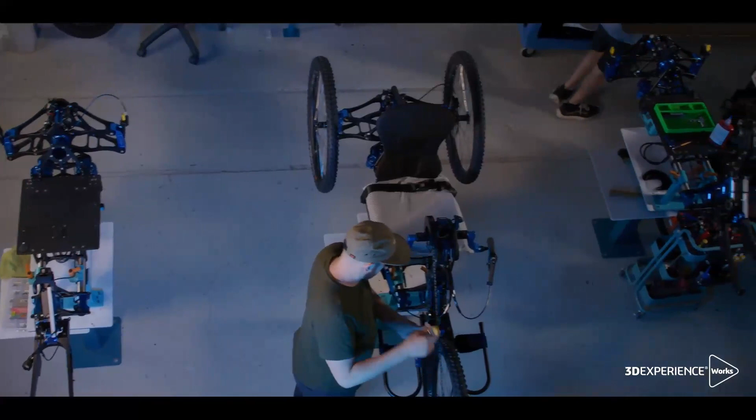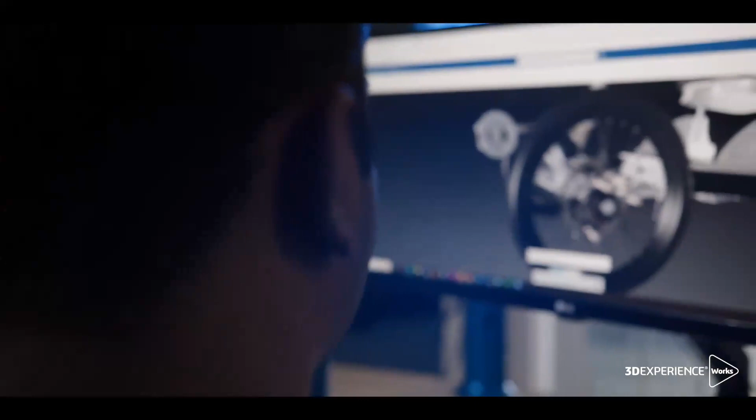So he started off with an initial design, and as we expected, ran into design challenges. So he started acquiring the SolidWorks software, and from there onwards, his product just got better. You now have 3 different types of development products in the market for different types of customers, automated systems or a hand-driven unit. Since then he started his own business, manufacturing and exporting these cycles to different clients and customers, making him a very successful businessman. As we speak, he's actually also busy working on a 4th iteration of this bike. His feedback on this video, unfortunately there's no audio, was that without the use of SolidWorks and the capabilities of the SolidWorks portfolio simulation solutions, he wouldn't have been able to come this far in his design cycles in such a short period of time.

He's also, using our software, exporting to his partners, customers, stakeholders, and sharing data with his manufacturing, with purchasing, with his other team members. So as we go through the portfolio, you guys will see how he achieved this moving forward.

So the focus of today is pretty much to improve productivity, focusing on design, how we can make our designs better, have a better end product at the end, and then expand, like the Boet team, expand what we have and use the SolidWorks portfolio to make our products better for our end customers and have a quicker time to market.

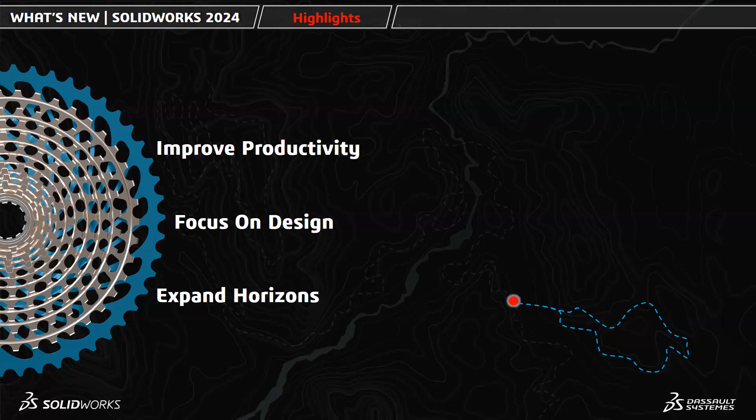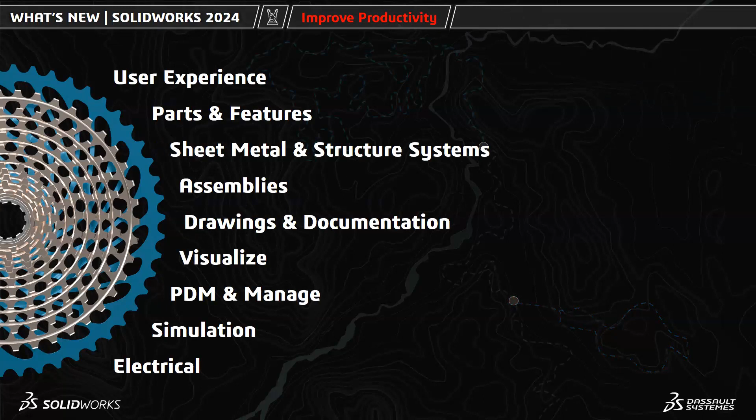A short overview of what we will cover: some of the user experiences, parts and features, some enhancements in sheet metal, our assembly environment, the important drawing changes, how we can do renders for our customers, and simulation changes to see how something would behave under certain stresses and factors.

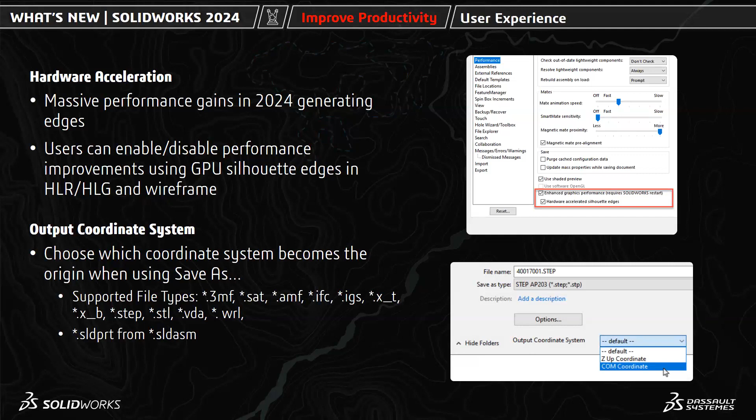So let's take a look at some of the parts and features enhancements that made this possible for us. I now have the capability to set the preview in my sketch environment, where I can actually put dimensions on. I'll show you in a short video clip just below this.

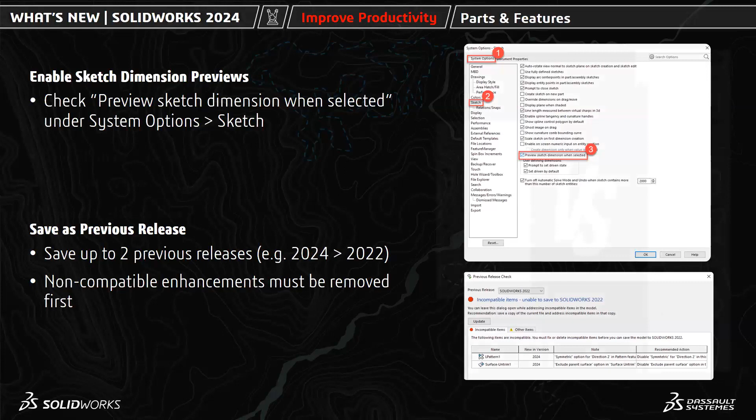When we look at simple part designs, our feature tree has expanded exponentially. There were just a few functionalities before, and since the 2024 release, I think the feature tree has expanded almost double. Mass calculations has been a huge factor in working with parts and the assembly environment.

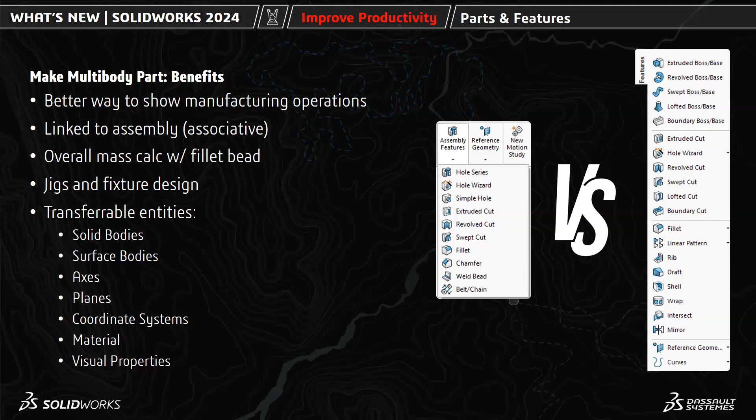So I can have an invert function of a sketch, which was not previously possible for part designs. Also on the same part, especially for the manufacturing side, I can now have a cylindrical or a square bounding box, so I can define the material around the specific part.

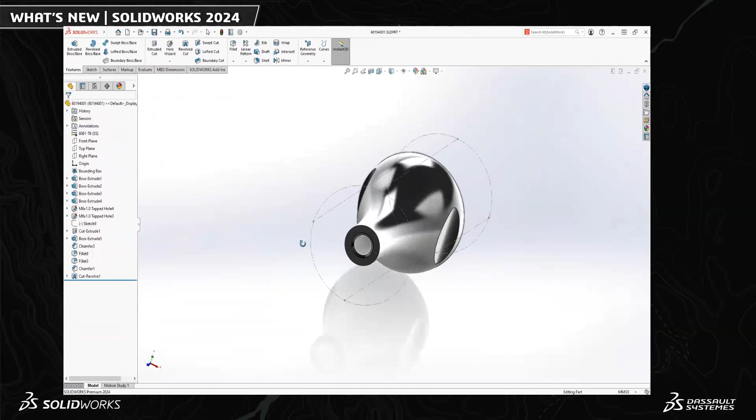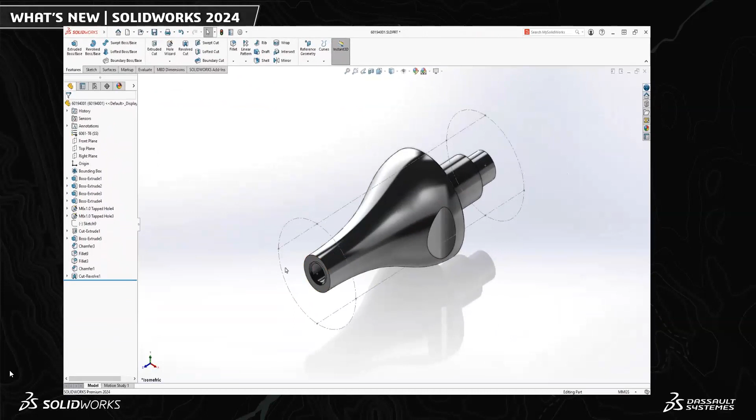Let's say I want to manufacture this part and send this off to my CNC machine. I can then tell procurement, this is the part that I want to machine, this is the bounding outside material that we need to order, and I can make it part of my part list. So it makes it much easier for procurement and material ordering.

Some nice features for hole enhancements: we have a hole wizard where we can put in intelligent data for hole annotations and hole creations. As you can see on the preview, I can put hole positions from a sketch, use the pattern, and then deselect which holes I don't want to be part of that selection.

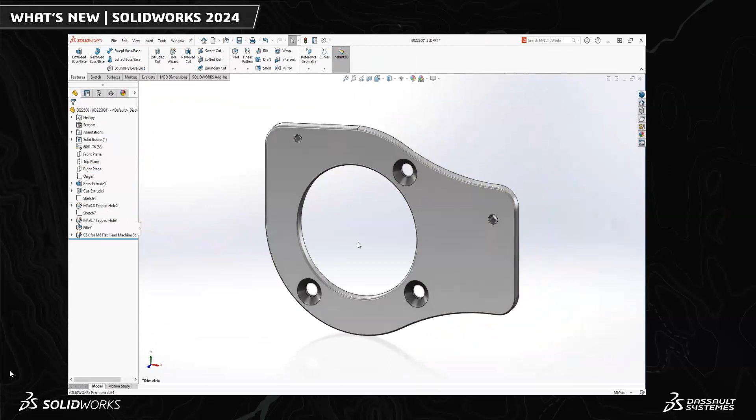A great enhancement that I personally like is the hole wizard linear pattern, where we have more control. As you can see here, we just have two simple features. I want to pattern this in two directions, and I want it to follow a specific shape.

So just to show that again, I'm taking that pattern of mine, making it symmetric around one axis, and I want it to follow a certain part. So it will actually follow the curvature of this part, which was also not previously possible.

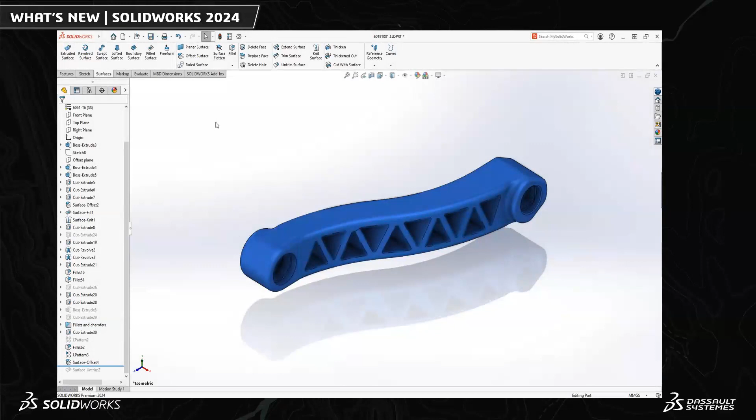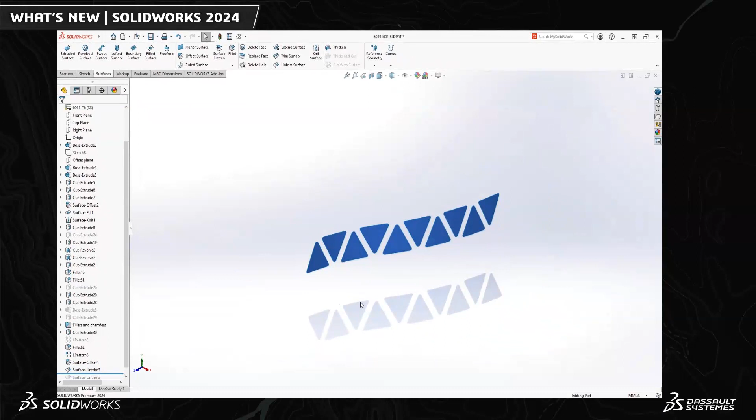So I can then take that specific part and cutoffs, and I can now actually create surfaces from geometry that does not really exist. So let's say, for instance, I want to use this for a 3D printer, or to have that 3D printer support. I can have an invert selection, create a surface from that, and use that then as my supports when I want to do 3D printing.

One of our big ones, as explained before, I can take my part design and save it down to a previous year release version. This down saving capability is for part design, for assembly design, and for drawing. So it's not just for part environment or drawing environment.

If I want to use specific parts in manufacturing, I can take an assembly and convert it to a multi-body part. This works especially great when I do manufacturing or machining, when I want a lightweight design because in the end this is going to be one part. So I would have one assembly at the factory, but I can create this as a multi-body part. I save it off as one part, and I can machine and manufacture on those multi-bodies separately.

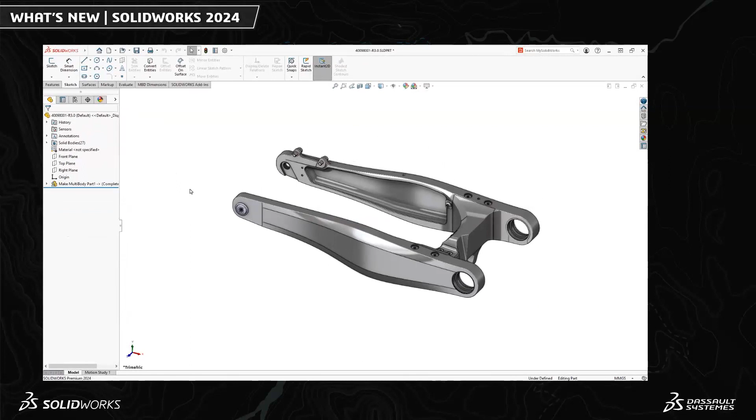Let's take a quick look at what our capability enhancements and changes were for sheet metal and structure systems.

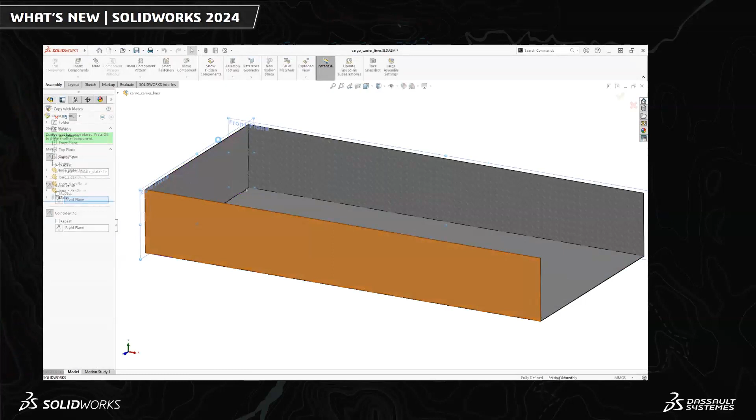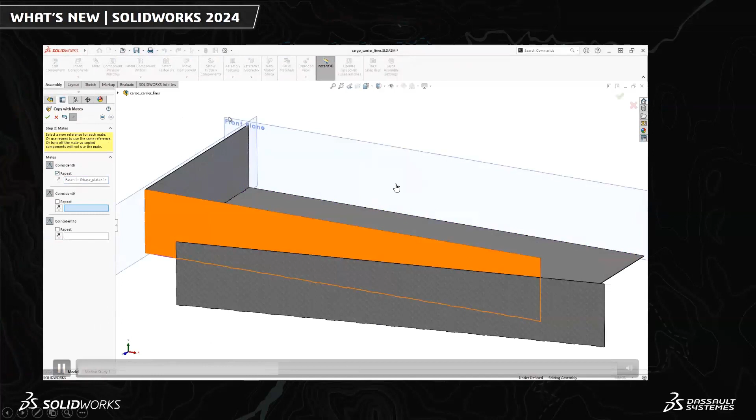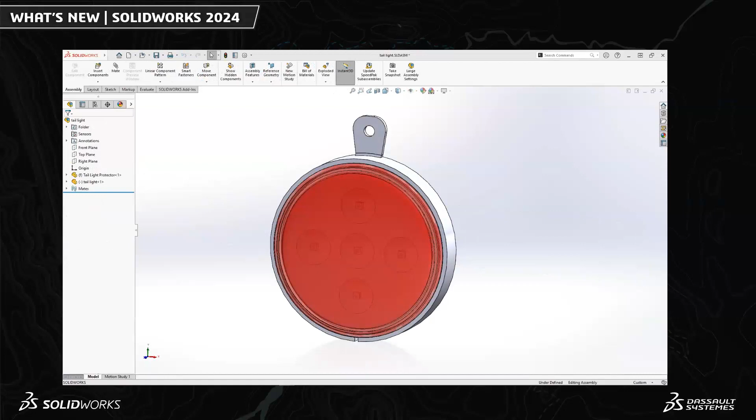Also a great tool: I can take a standard part, put a rip functionality in it, and create a simple flat pattern directly into sheet metal for manufacturing purposes - fold, flatten, and unroll my assembly just with a simple click of creating a rip in that assembly.

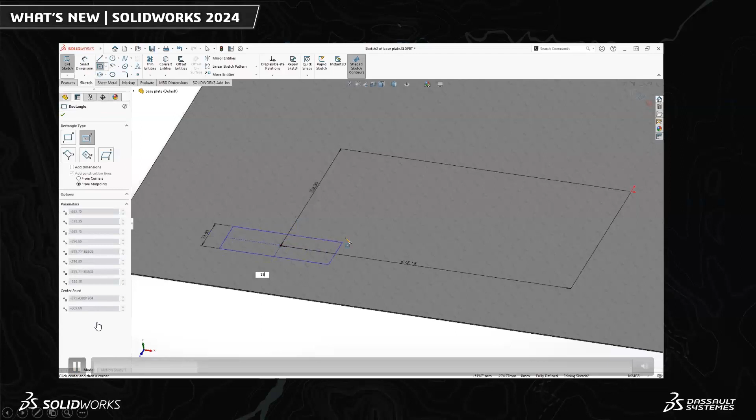A great tool which I love is the new stamp from 2D sketch. I'm just creating a simple 2D sketch extrusion and converting it to a stamp format. I used 2D capabilities, a normal square rectangle which I drew, and from there used the sheet metal functionality to say I just want to use this as a stamp feature, and put in the stamp values. Using macros, I have my stamp capabilities, making life way more simple in the sheet metal manufacturing industry for us.

One big enhancement for our structures is end treatments. Previously I had to do end treatments one by one. Now I can select all my end treatments simultaneously, choose what end treatment I want, and get that end treatment applied to the whole assembly done for me.

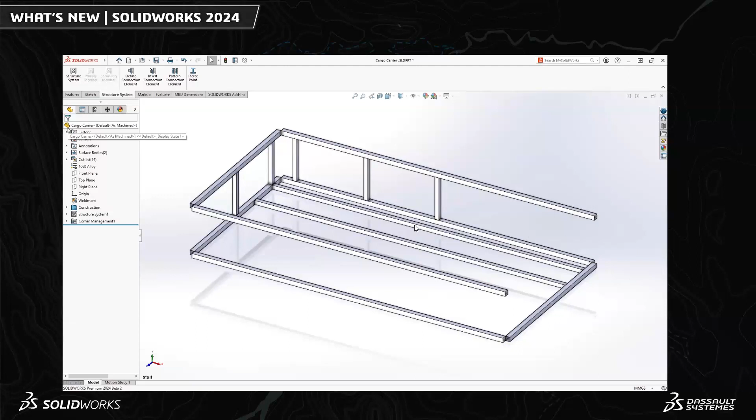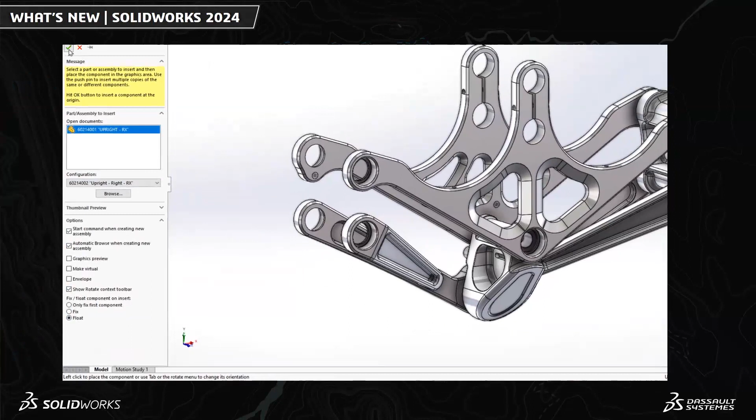Let's take a brief look at the big enhancements we have this year for assemblies. Except for performance and speed enhancements, there are also a few nice, very useful advancements for assembly. For instance, I can set my assembly for inserting floating components - set that as a floating component, and now animate without having to put different weird constraints or dimensions on it. I have now a floating assembly just by using the floating assembly function we have in 2024.

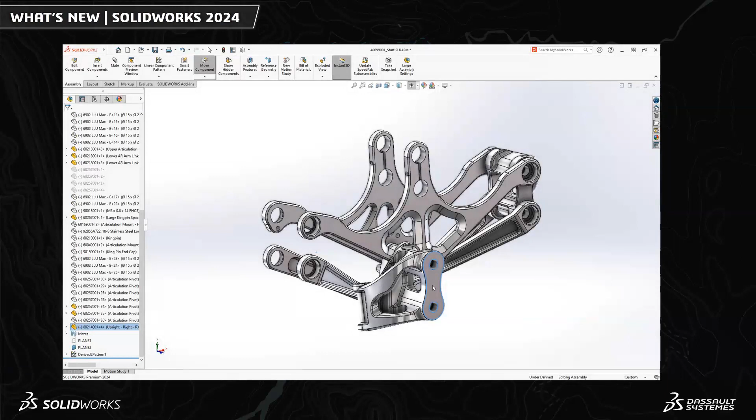Another great feature is using the width mate feature. If I have a part that needs to fit into another part but needs specific spacing between those parts for free movement, gusset, or spacer purposes, I can use the width mate function and say center this part between those two faces, and it will automatically calculate those distances and put that part exactly in the center between those two frame parts.

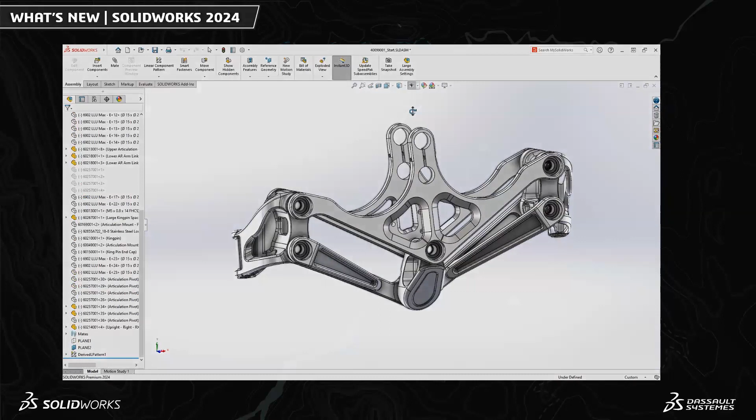Also, if I have specific pins that need to work in specific areas only, I can have a mate reference - we call it intelligent mate. So those rivets can then only fit in specific areas. If I have specific parts or components that only work in specific areas, I can predefine that mate automatically, and as you can see in the preview, it snaps to that mate. It will not fit into other holes - it will only snap to those predefined values I have set.

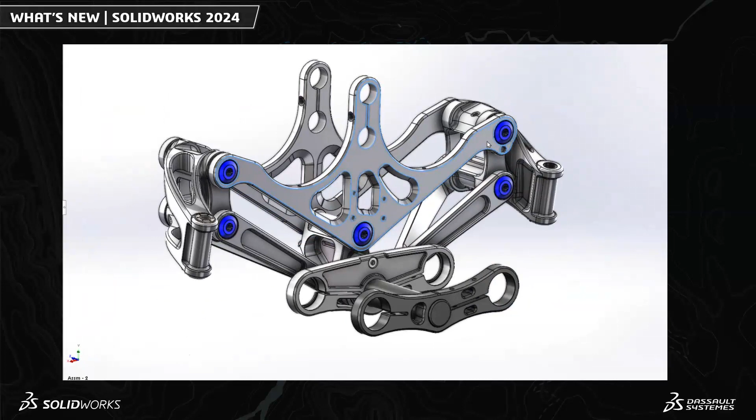I can take this further by bringing it back into my drawing environment. I can take custom components, put a component reference into that part, and when I go back to my drawing, I can bring those custom references back.

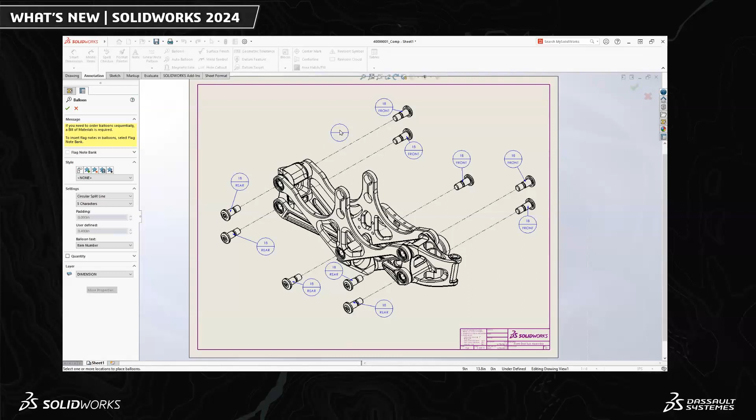These pins need to fit in the front of this assembly, and those pins need to fit in the rear. It works very well when I have specific components that only work in specific areas, and I can send this technical information back to the shop floor or assembly floor so people know exactly where and how to assemble this without any confusion.

Another great feature I love to use is the defeature function. So I've designed this model, and my customer wants to see what we have, or we want to use this as a placeholder in a bigger assembly, whatever. So I can use the defeature functionality.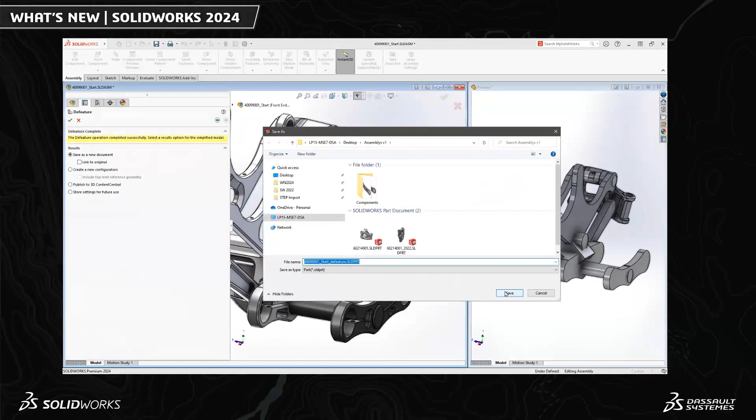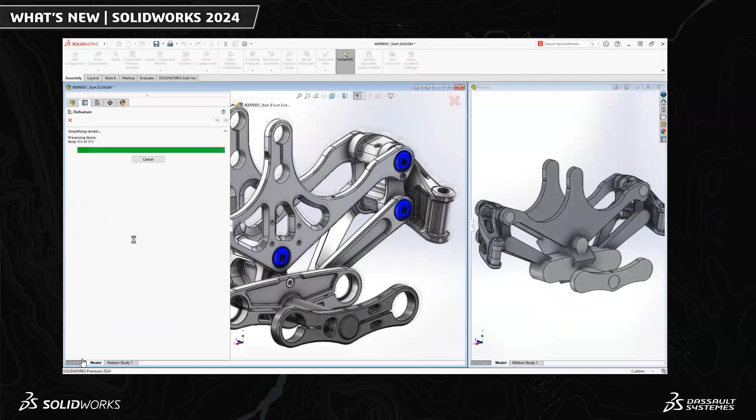What it does is allow me to decide which intellectual property I want to remove from this assembly or sub-assembly, and it will only show what I intend. So it does two things: it takes away my intellectual property, and it reduces memory for a lightweight placeholder if I want to use it in another portion of my designs or other sub-assemblies, which makes this defeature functionality a very useful tool.

I can also add flexibility into the movement of my assembly. I just want to see... oh, this one is not playing, sorry. I just want to add flexibility to see the movement of specific parts within the specific assembly, without clash detections, without interference.

I would simply select the flexibility function, and as you can see in the preview, the front axle I've moved with my limitations, so I can see if there are interferences, if it will work, if there will be any clashes, and so forth. Previously, this function would require a lot of constraints and constructions. Now it's just a single button, which is huge for us as well.

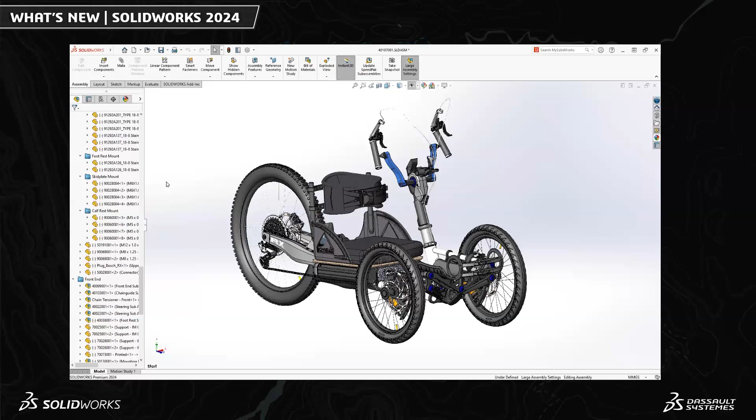If you can quickly look at drawing and documentation functionality.

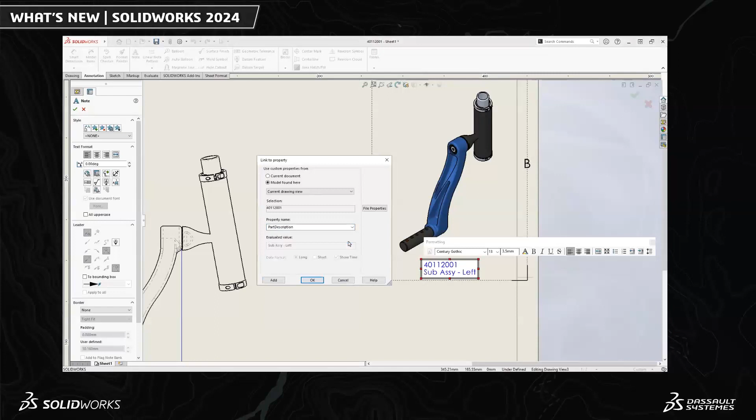Previously, if I had specific properties that I wanted to link into my drawing, I had to either type it in manually or override my drawing. Now I can add those properties into my designs, and then pull those properties back to my drawing, making it interactive and more intelligent.

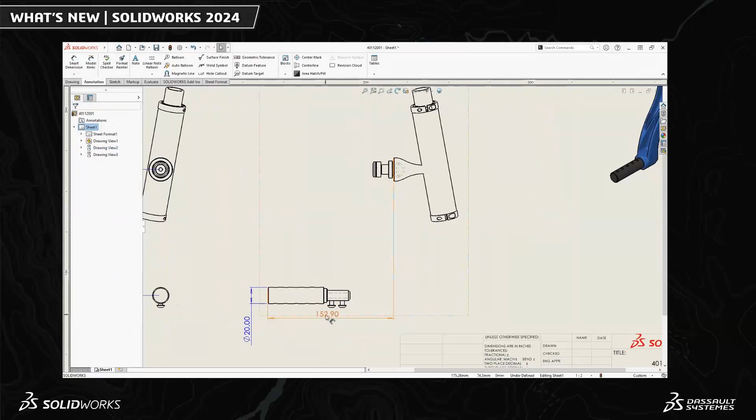So when that property, dimension, or name changes, my drawing updates automatically. Sometimes when my design changes, my dimensions seem to dangle. Previously, it was always difficult to find out which dimension wasn't in its right place. Now in 2024, I get a preview with a green color showing me that dimension isn't in the right place. When I click on it, it gives me a red indication of where the broken link is.

I can just click on my new dimension and it will reattach those dimensions for me. There's also a big enhancement for chain dimensions. I can just select the chain dimension functionality on the portions I want to create the chain dimension, and it creates the chain dimension automatically for me.

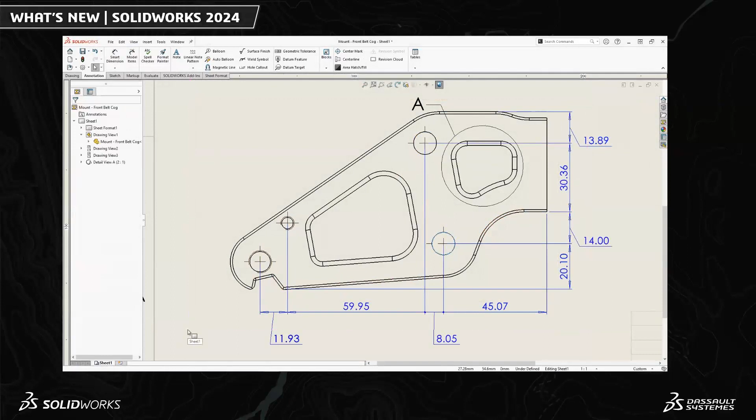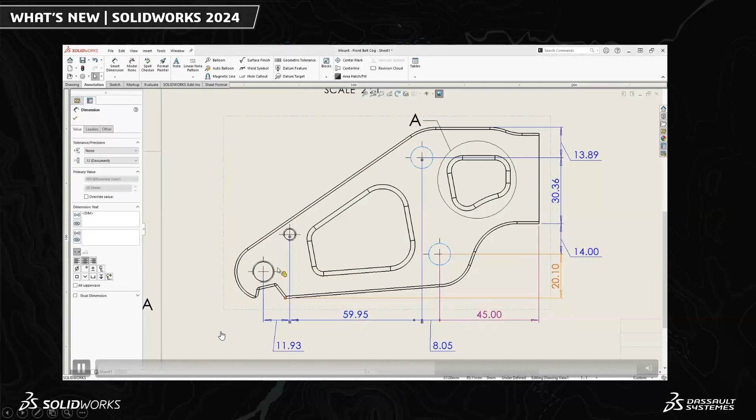Sometimes we get a dimension that was changed by someone, overridden in the drawing, and I wouldn't know. I would have manufactured this only to learn that it doesn't fit, that it's wrong. But now, if I get a specific size and override those dimensions, it will actually change color in the drawing environment. So I would know this dimension has been overridden with a specific value, and I can investigate why, or whether it will still fit or work, saving me time and a lot of money from throwing away prototypes because of incorrect dimensions.

But sometimes we need to manufacture directly from the 3D model. So in 2024, I can now have my hole tables inside my model, inside my 3D design. It doesn't have to be a drawing, so I can pull a whole dimension table exactly straight from my 3D model.

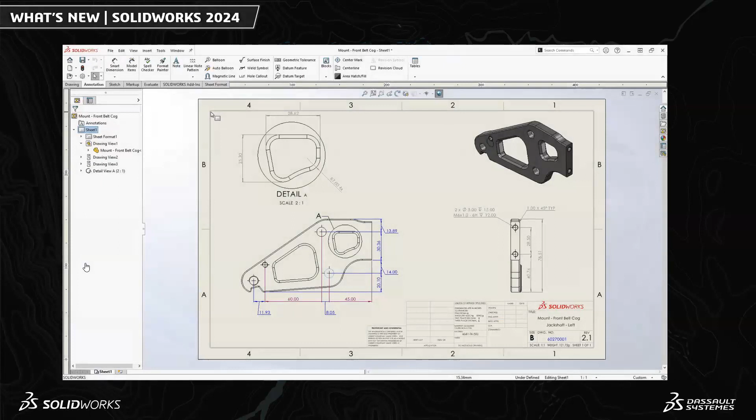And similar with the parts and assemblies, as explained before, I'm also allowed to save this down to a previous year release and just rename it according to my needs.

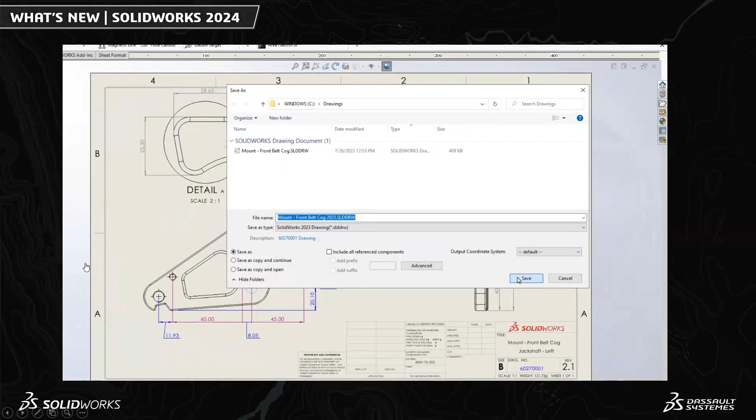A lot of enhancements has been made on the way ray tracing has been done, the way lighting has been done, keyboard shortcuts updated, and more flexible, easy to use, customized libraries brought into Visualize this year. A reorganized library provides all appearances in a new format ready to download just by drag and drop.

Appearances will be organized into their own subsets with only the applicable settings shown. However, each material is built on the full enterprise shading model, which has controls to make complex and nuanced appearances. I can have my own libraries imported in, create my own colors, use the extensive library that is part of the install, or download different colors and appearances.

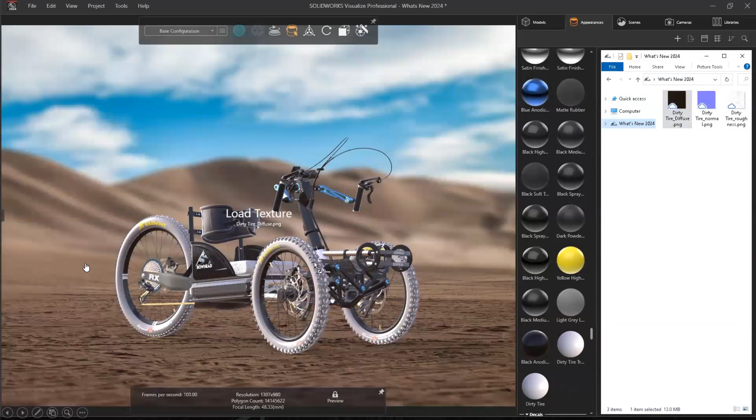Just by dragging and dropping those appearances from my library directly back to my model, it will automatically update that appearance, and you will see that the coarse tread of the tire has changed just by bringing in those properties from outside.

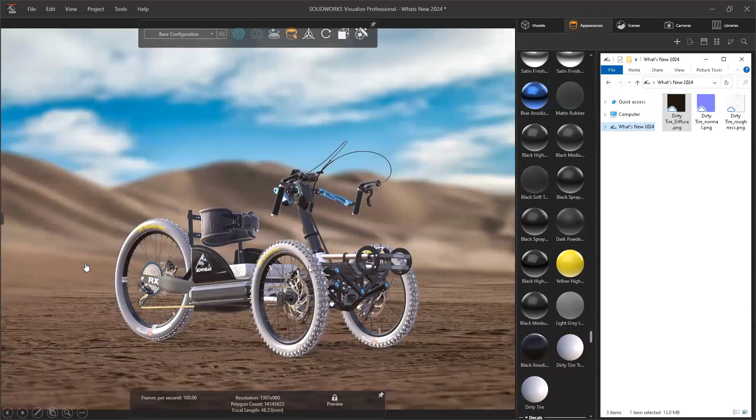The quality of the renders have also changed significantly. These qualities often has made use of image textures, maps, DSPBR formats, and now with the 2024 release, the way the processor takes these and computes these renders has saved a lot of time and effort bringing in those appearances, so I don't need such a high-end machine anymore to do those high-end renders.

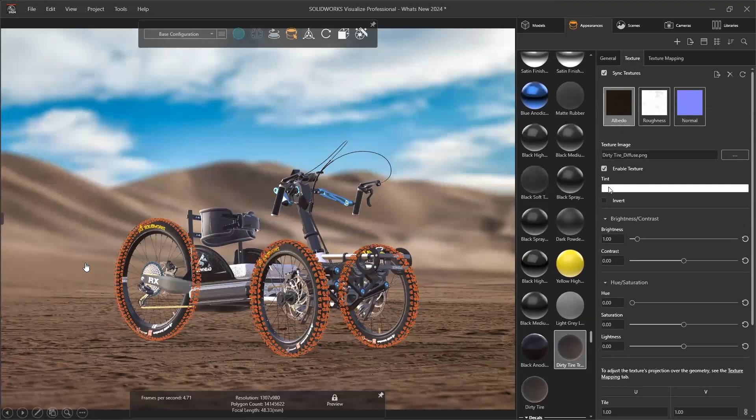I can take my custom properties, just bring it in from there, or I can take external properties that I've designed myself. Any image I can think of, I can bring in as a background, as a texture, and use this back into my custom renders that I'm busy with.

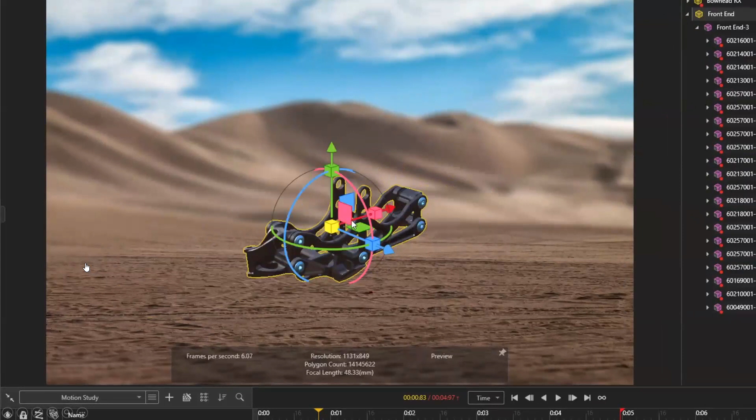But setting up your scene can be time consuming. Parts of the renders can be taking a lot of time. So in 2024, it dramatically reduces the time with a revised manipulator. Consolidating and highlighting, the new manipulator looks similar but offers a much cleaner experience.

So if I want to have a specific representation of my assembly, I would simply use this manipulator and then select which parts and files I want to use. I can just pull it out in a presentation format, and create photorealistic renders of how to assemble or how to view or how this part would come about.

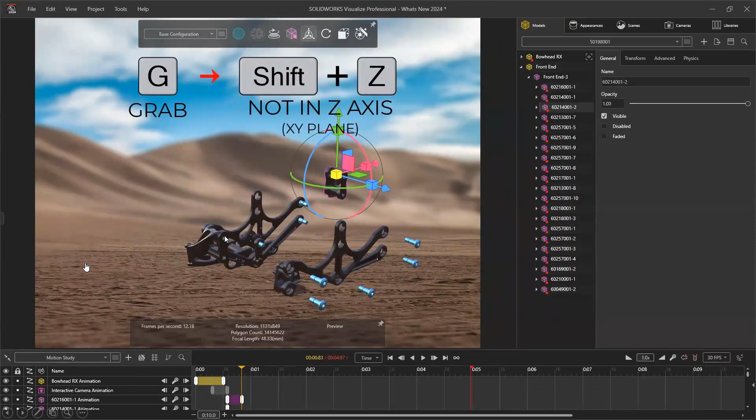I can scale this in each direction, and then incorporate this back into my main assembly, back into my main design, and it gives me a nice presentation, nice overview of how this would look like if it has been dismantled.

But several elements have got a facelift. So we like the new preview settings. More complex outputs such as interactive rendering has been simplified, as well as animation frames can now be used as interactive inputs, which open up all kinds of creating options for interactive playback.

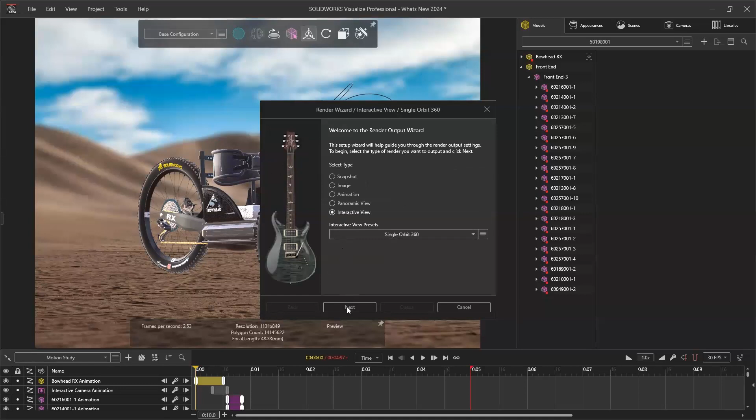I can play with the colors, as you can see on the screen, and then once I hit render, I can now start rendering my assembly. Some animation changes. There's a lot of control that I have on my output before I can start the render.

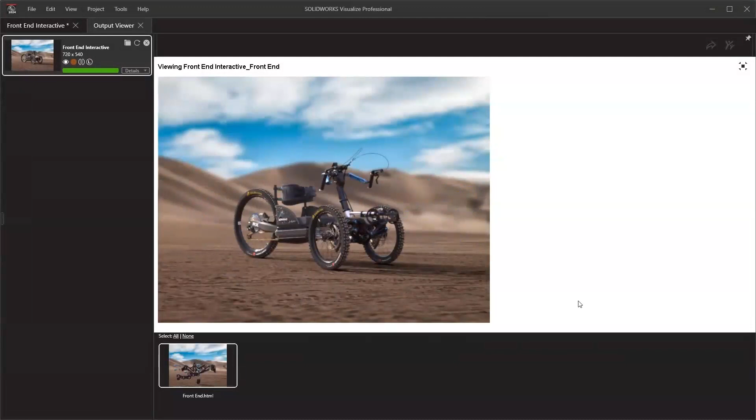And as explained before, there's that video of taking the frame construction, taking it out of the car, opening it up, rotating it, putting it back in. So it creates very nice video renders for my end user, showing the product that I'm going to give to him.

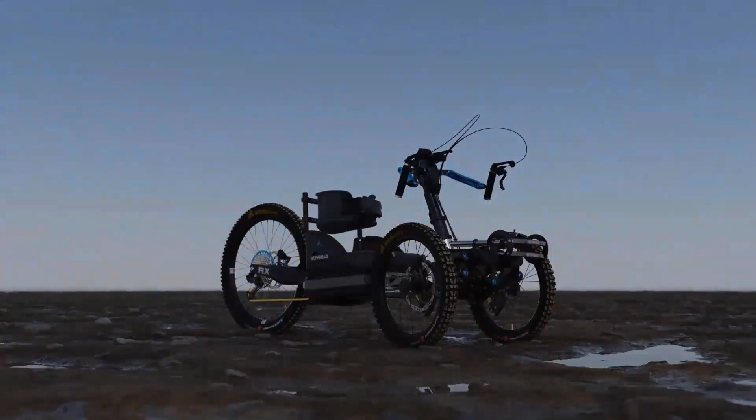Big enhancements has been made on the background sunlight environments, import of texture environments as well. So as we can see in this preview, displaying a 24-hour cycle of my vehicle in a specific place, it can show, okay, this vehicle has been standing here for 2 days. This is how it looks once the sun comes up, the sun goes down, taking different angles, creating really realistic renders from this model of us.

Then we would have a brief look of data management. Data management is very core to our business because if we have a design, we have to do something with it. We have to keep track of it.

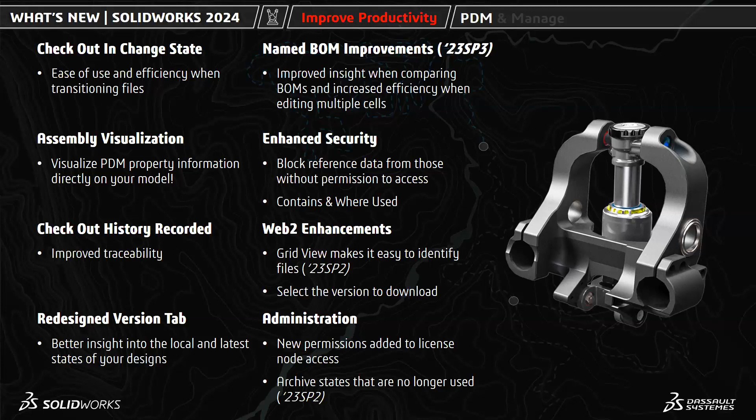Who's making changes to what? Who have last worked on a part or a model or a drawing? What versions do I have? Revision and version control, life cycle control, all can be done using SOLIDWORKS PDM. And also, if I need to do ISO certifications, I have to have history of my design iterations, and PDM is the perfect tool to do that.

But as previously mentioned, we have put a lot of effort into design speed. You will see in my next video that if we compare the speed of PDM 2023 compared to 2024, there's significant changes to how quickly and effortlessly we can do imports, file changes, design copies.

As you can see on the left-hand side, the PDM 2023 is about 3 times slower compared to what we have achieved in SolidWorks PDM 2024.

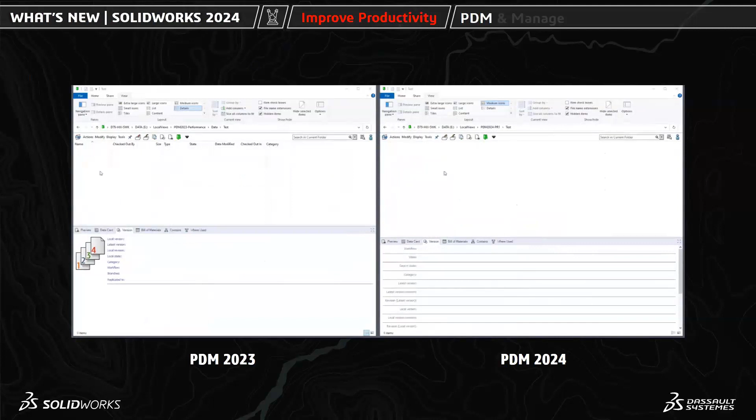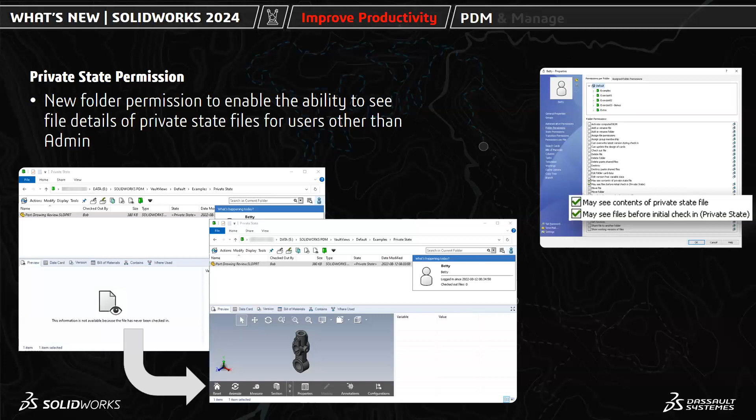I now have the capability to set specific folder permissions for users that don't have admin access. Previously, if a user didn't have specific PDM licenses, he was not able to see or preview some of the stuff.

So now I have the capability to give external users viewing rights for PDM and specific files. I can also use color controls with my lifecycle states, so I can put all my pending approvals in red, release parts in blue, and work in progress in yellow. This gives me a quick interface overview to see my progress, where the backlog is, and who's sitting with what.

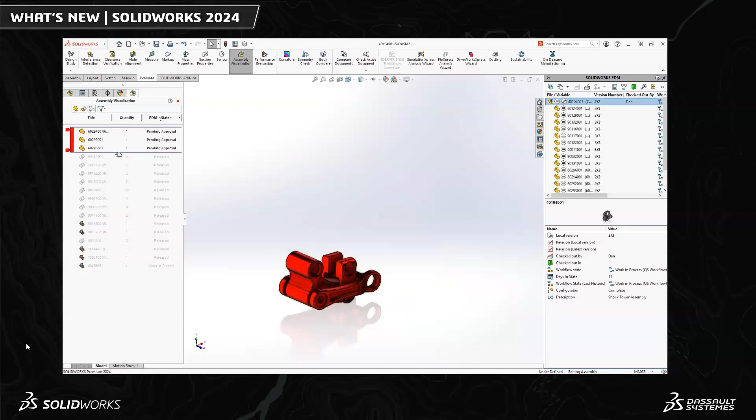With the drag of a slider, I can see, okay, pending approval is sitting at marketing or machining shop or whatever. So I can have a very high-level overview very quickly of what's happening with production.

I can also have a no-right view by visibility. So if a user doesn't have specific rights and tries to log in, I can get a notification to see that someone has tried to log into a specific view that they're not allowed to see or have access to.

As I explained before about the management of this motorcycle and bicycle, they also explained that simulation was a big part of their design process. They wouldn't have come this far without using our simulation portfolio tools.

SolidWorks simulation enables you to optimize your design, determine product mechanical resistance, ensure product durability, topology and natural frequencies, and test heat transfers, buckling, and instabilities. It can also perform sequential multi-physical simulations and high cycle fatigue simulations. Our simulation portfolio is very big.

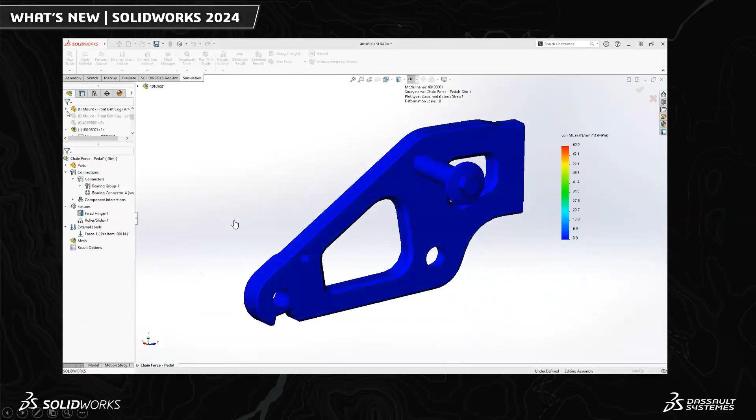We have also enhanced a lot, especially in bearings, when we have calculations for bearing designs and the support on that bearing, with more quick and interactive simulations. A lot of effort and time has been put into focusing on external bearings with external force concentration. Usually the input to calculate this in the past was way too intense, but in 2024 it has been simplified to just a few clicks.

But that's just in a nutshell where simulation stops. We can do plastic simulation, so in the injection environment, for plastic injection there are 3 different options: for the molds, for the flow of the plastic, and for the outcome of how to create those molds, assisting in creating those molds.

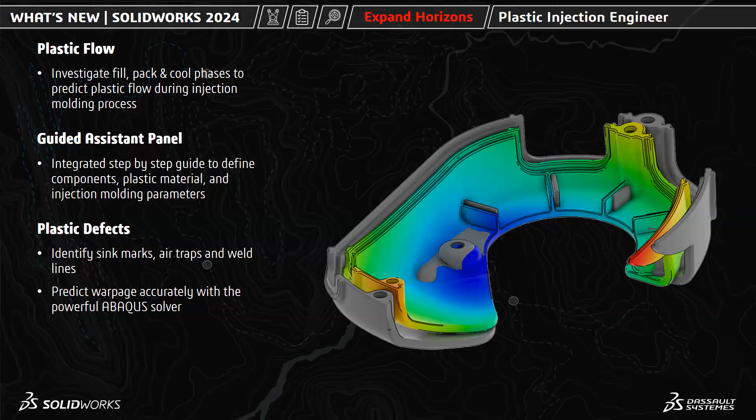We have those options. For HVACs, if we have specific airflow in a specific area, heat or cold transfers into HVAC systems can be simulated. For liquids, if I transfer liquids in a big vehicle, the sloshing of the liquids inside that vehicle, the flow of liquids inside the system. For frames and structures, if I have the frame design and put a specific load on a structure, I can see what the outcome will be. Like I explained, our simulation portfolio is really big. If you would like to know more about this, we would gladly assist to show you in depth.

And lastly, I want to show our electrical capabilities. For newcomers, we have 2 different types of electrical: electrical schematics, which is a 2D install base where I can do 2D cabinets, which was not previously possible. I can do 2D layouts, cable lengths, all the cable intelligence and treatments for cables can be done in electrical 2D, and then I can do advanced routing in my designs as well.

I can decide whether I want to do an automatic route, or follow a specific path along a specific route that needs to follow that frame. So I can create a specific path for this wire, and from here I can calculate the length of the cables, the strength of the cables, the end conductors - all that intelligence is built into

SolidWorks Electrical.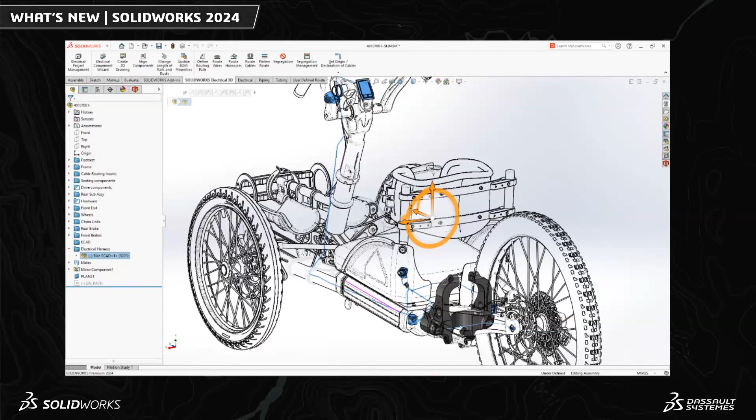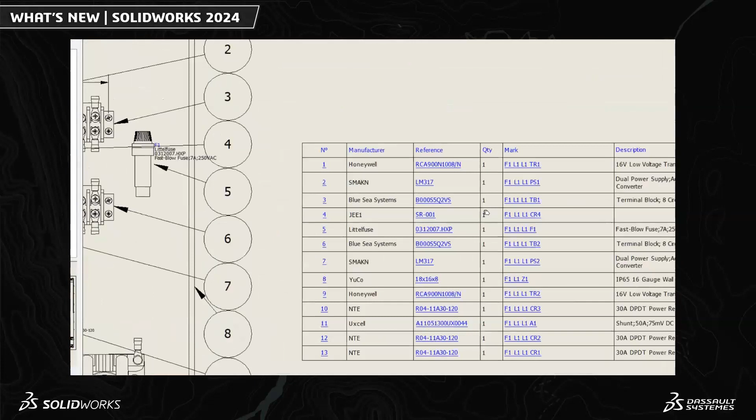A big enhancement in our drawing environment is creating automated electrical drawings with balloons, with the intelligence built into that. That was previously not possible - this used to be a manual process. Now we can bring those balloons in automatically as well.

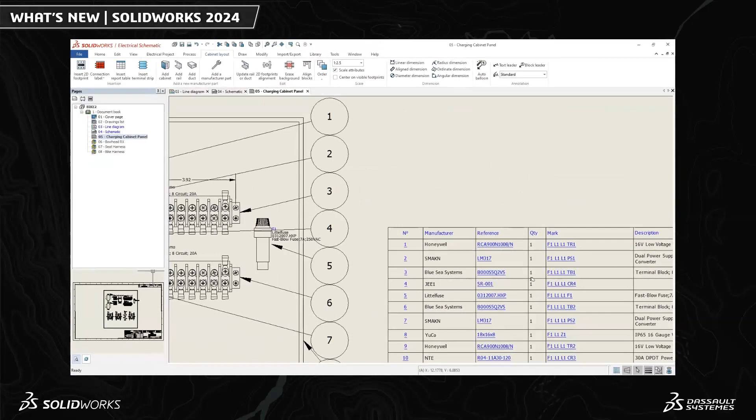But moving forward, we need to focus on our design. All new licenses will have a portion of cloud services, which would allow us to communicate better with our customers and stakeholders, have better browser viewers, and do markups. We want to focus on how we communicate changes and alterations to our peers, to customers, and to our team.

Our design team has different needs. Many want to communicate more efficiently with their partners, some need better ways to secure, store and revise their data, and others are looking to provide structures to their team processes. So how do you solve these needs without taking a backseat to everyday file management tasks?

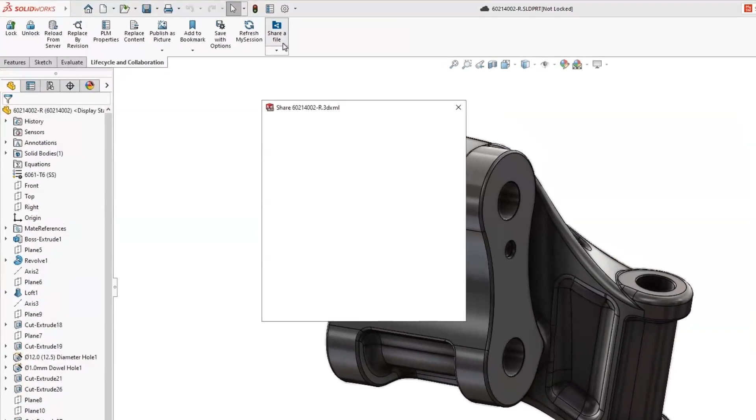With cloud services, there's a convenient tool like share a file - we call it share and markup - that removes the friction associated with sharing your designs, both internally and with your customers. Simply indicate who you'd like to input on the design, how you'd like to share it, and the feedback you're looking for. There's no file attachments or viewers to download, just a notification with a link allowing controlled access to your content from a browser.

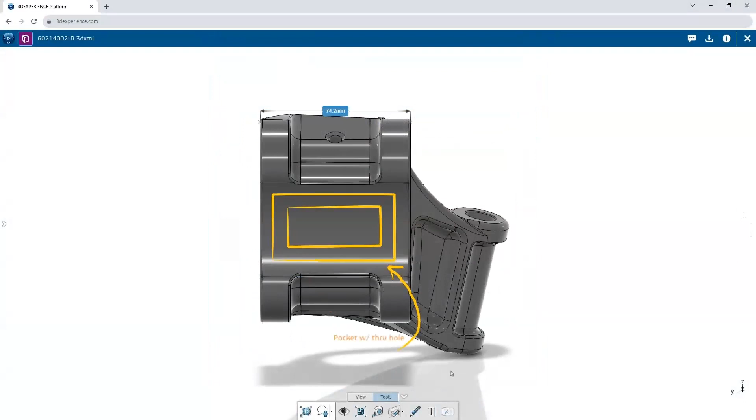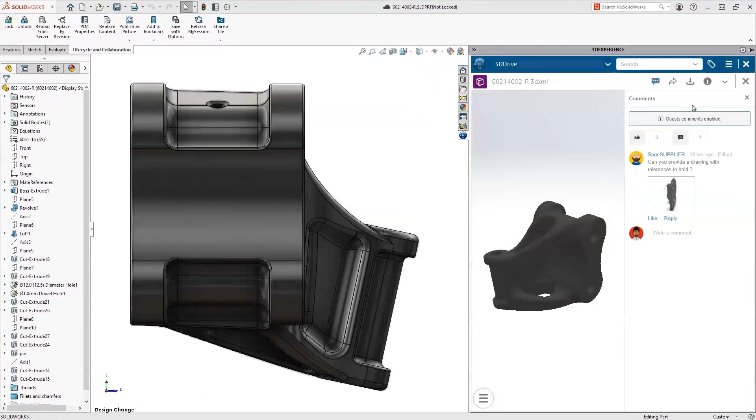Dimensions can be taken, sketches can be made on the model to communicate design ideas, and markups added from multiple views to convey manufacturing suggestions. When finished, comments capture the markup and can be used to request additional information. The best part is you never have to leave your SolidWorks window - you can access any comments and markups right from the task pane. They not only contain the annotations we added, but remember the orientation of the model as well, making it easy to understand your feedback.

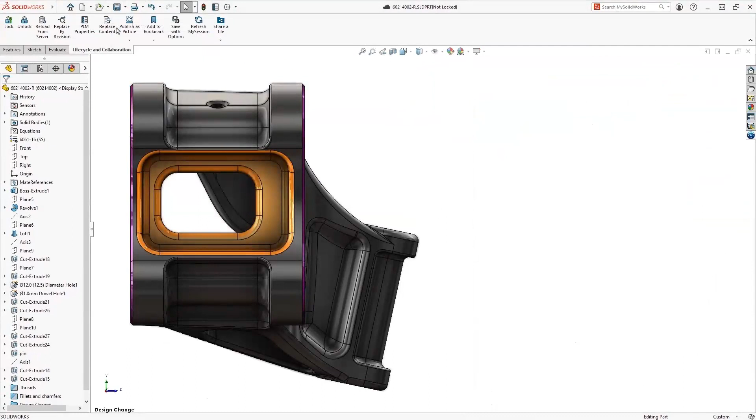When it's time to make design changes, Cloud Services has built-in revision management that is as easy as saving the model and drawings. Simply add a note, indicate what the changes are, and your revision is securely saved. On the drawing, the revision table automatically updates with your change comments. Plus you can track progress on your design by simply updating the status - no need to move files from folder to folder, from server to server, just a convenient tool designed to make your life easier and keep your focus on your designs.

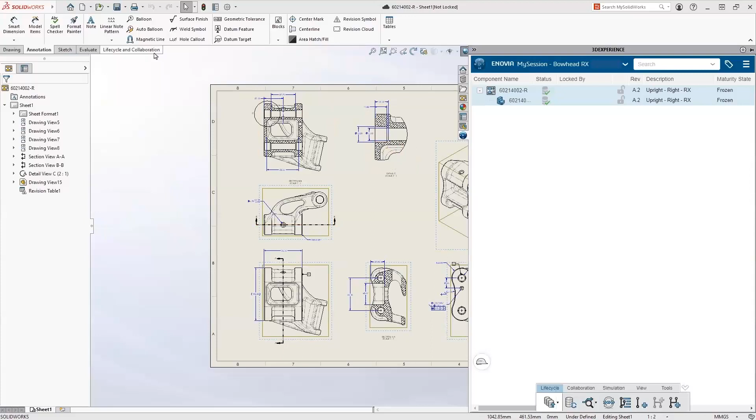When a new revision is available, you can choose to share the drawing as a PDF with your supplier or update an existing share with your new design. Either way, you're in control of how you output this file.

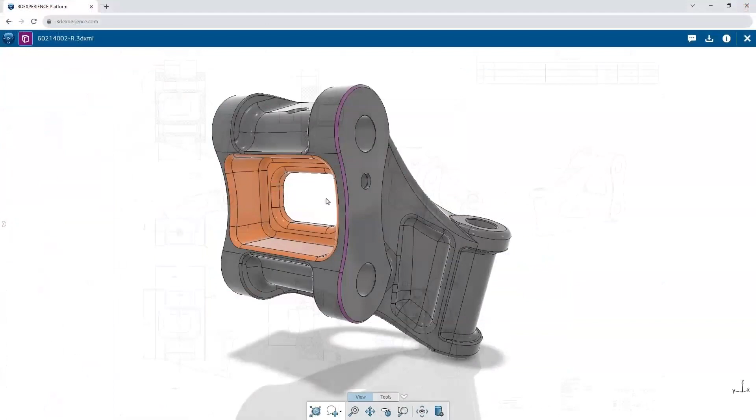So the SolidWorks portfolio is a powerful hub. Powerful search capabilities allow you to find assemblies on your design with ease, fully supporting your favorite features like mate references. When it comes to collaborating with your team, each member can lock a portion of the file and nobody else can work on that file - you only have access to that.

So at the end of the day, we actually made it to the top. It's been a long journey, but it's in our record books. Big changes have been achieved, we have big progress, and our customers have great feedback on the What's New events.